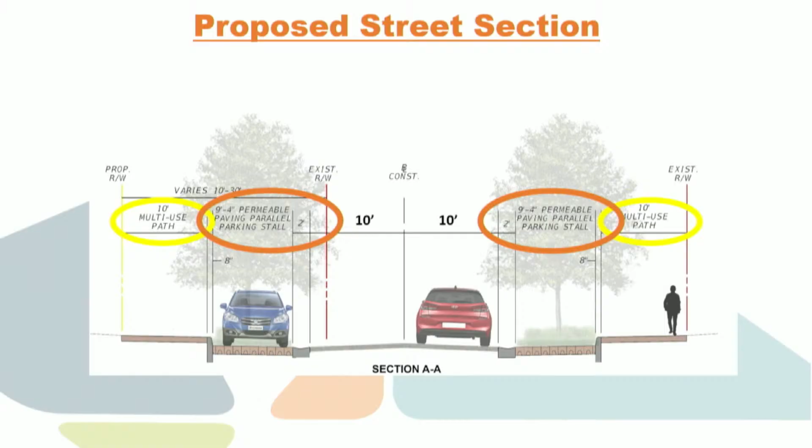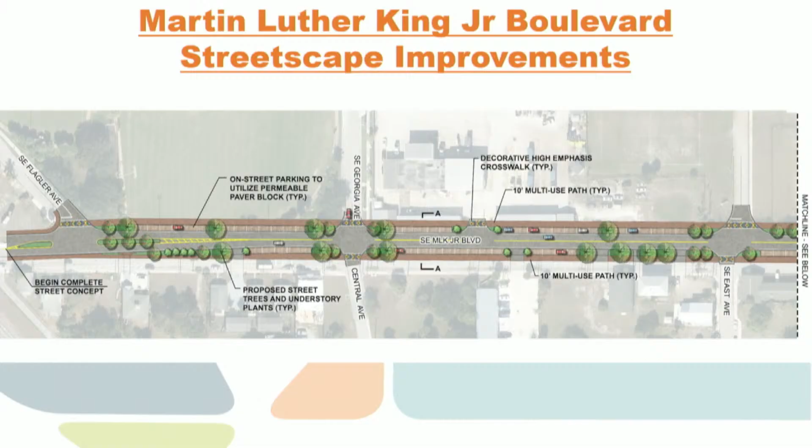So this is the concept plan. It starts just east of the railroad right-of-way at Flagler Avenue and extends down to Palm Beach Road. This is the eastern section, showing the streetscape ending at Tarpon.

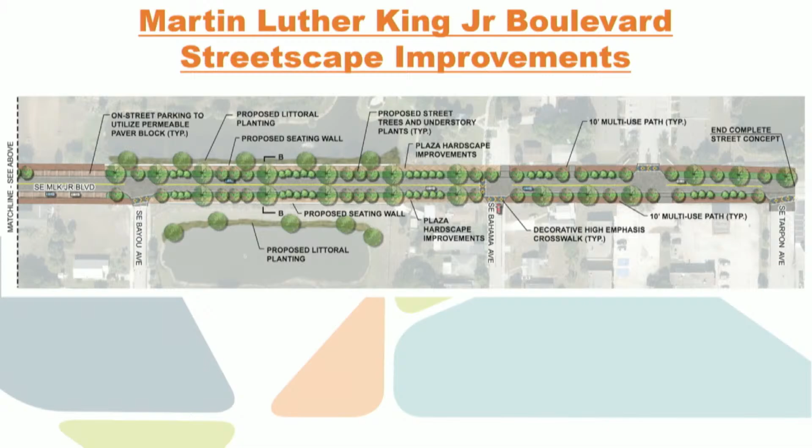At the time the concept plan was developed, we had not entertained extending the pedestrian improvements east to Palm Beach Road, but that is now a component of the overall project—extending the sidewalk improvements on the north side to Palm Beach. As I mentioned, 96% of online survey respondents were in favor of it. There is a sidewalk today on the south side, but not on the north side.

So the design aspects I wanted to speak to and present this afternoon consist of water quality, parking, traffic calming, the landscape palette identified for this corridor, proposed right-of-way needs, and a brief discussion of the community input that's been gathered.

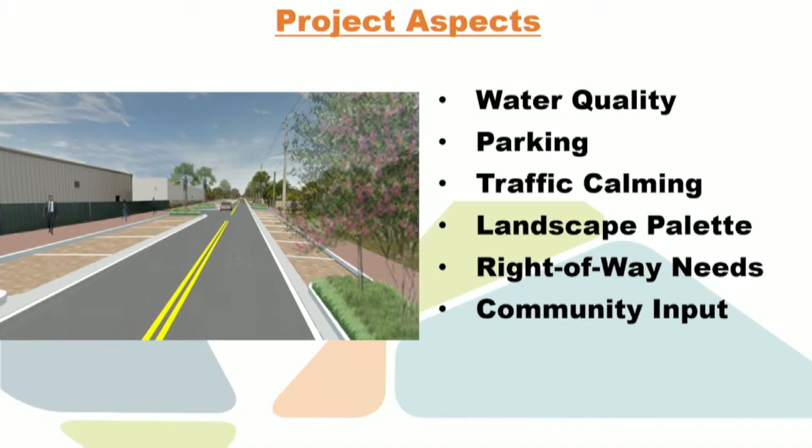The articulated permeable pavers are proposed to be located in the on-street parallel parking stalls, very similarly to what's been recently constructed on Seminole Street, within walking distance of where we are. The permeable pavers will sit on 18 inches of stone aggregate and will represent approximately 3/10 of an acre-foot of additional water quality treatment associated with the improvements of MLK Boulevard.

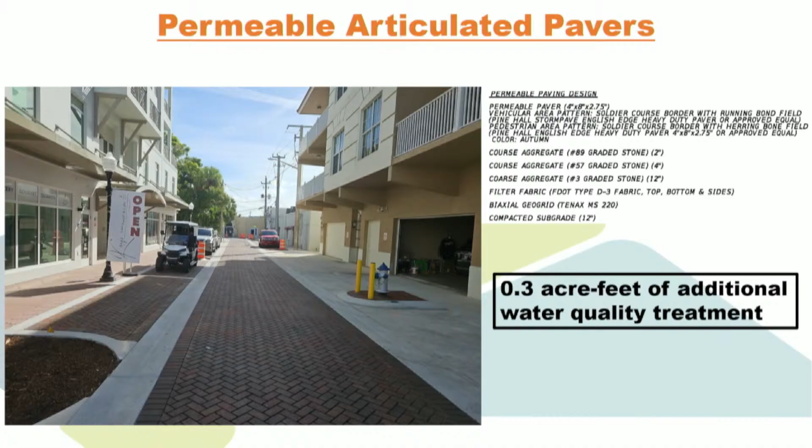So for the proposed parking, respondents and stakeholders provided a lot of feedback, and there was a strong desire not to reduce overall parking. The existing parking characteristics: we have 51 head-in parking stalls, 29 parallel parking stalls, for a total of 80 parking stalls today within the roadway right-of-way. 4 of those 80 are accessible.

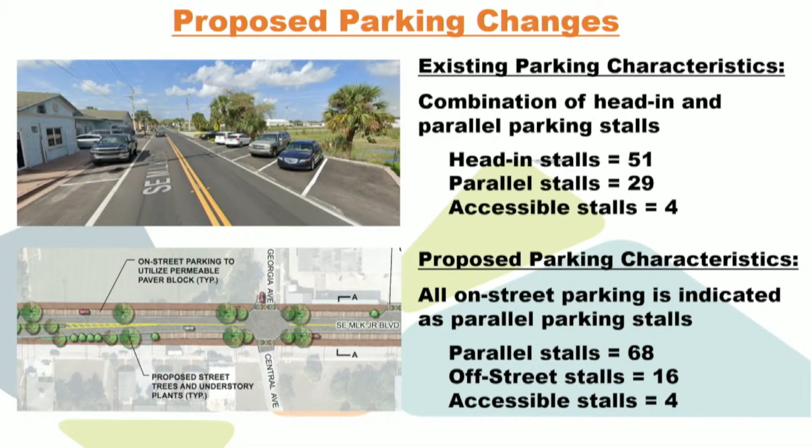The plan as it currently stands has 68 parallel parking stalls. We also have an off-street parking lot, which I'll get into more detail on, for a total of, I believe, 84, and 4 of those will remain accessible.

For the proposed off-street parking, because of stakeholder input and community reservations about a reduction of parking along MLK Boulevard, we have proposed to take a piece of city property currently used as an impound lot for the police department, on the north side just east of the solid waste compound. As shown in the image, this will represent 18 additional parking stalls. It is within city property, and this off-street parking lot will allow us to exceed current available parking associated with MLK.

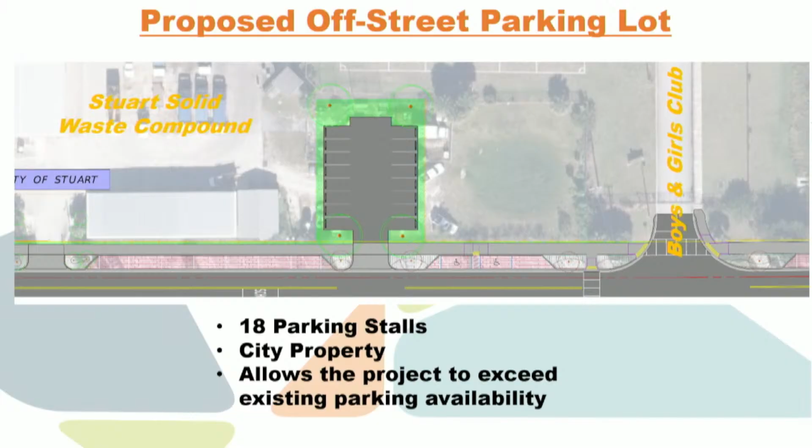So traffic calming was one of the higher priorities the community wanted to see—elements to encourage slower vehicular speeds along MLK.

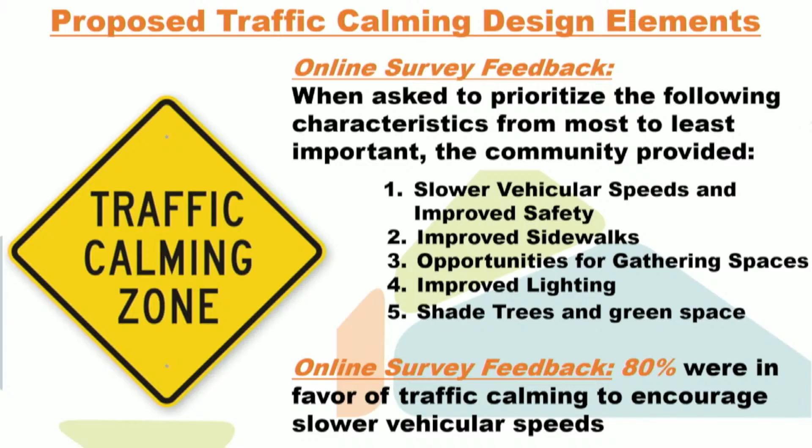They had identified that as their top priority, and 80% were in favor of traffic calming to encourage slower speeds. The traffic calming elements integrated into this project are on-street parking, lane width selection, intersection bulb outs, landscape placement, roadway material, and intersection stop control. I'll go into a couple of those.

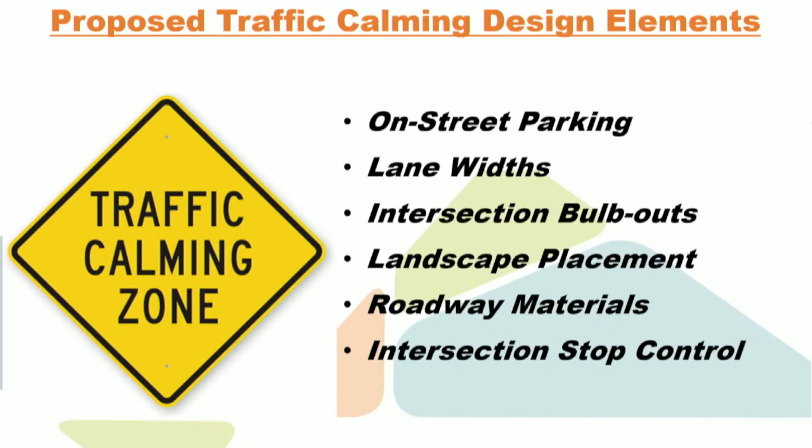Intersection bulb outs or curb extensions are an extension of the curb line, resulting in a reduced crossing distance for pedestrian crossings of the associated roadway. Bulb outs improve sight visibility between pedestrians and vehicular traffic, and encourage slower vehicular speeds by narrowing the roadway, with that projection of the curb line coincidental with the on-street parallel parking. Another benefit is that it physically prohibits motorists from parking too close to intersections, which can impede sight lines and be a hazard.

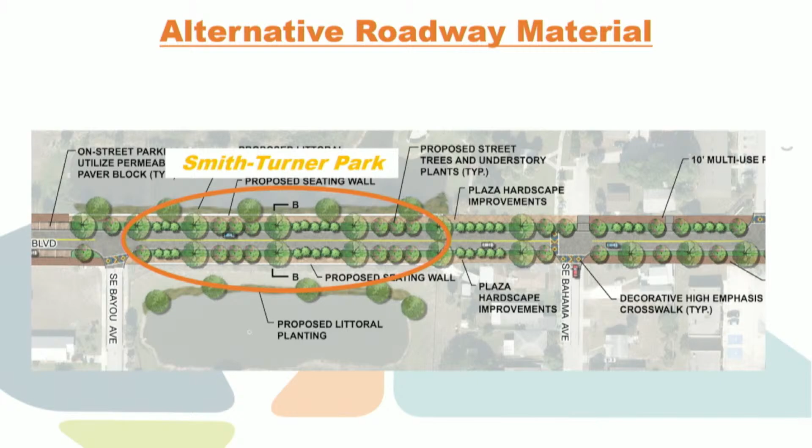For the alternative roadway material, like the parallel parking stalls proposed to have permeable pavers, we're proposing this stretch of MLK adjacent to Smith Turner Park to have permeable pavers as an additional element for traffic calming to encourage slower speeds. The rumble, if you will, transitioning from asphalt to pavers has been shown to encourage slower speeds.

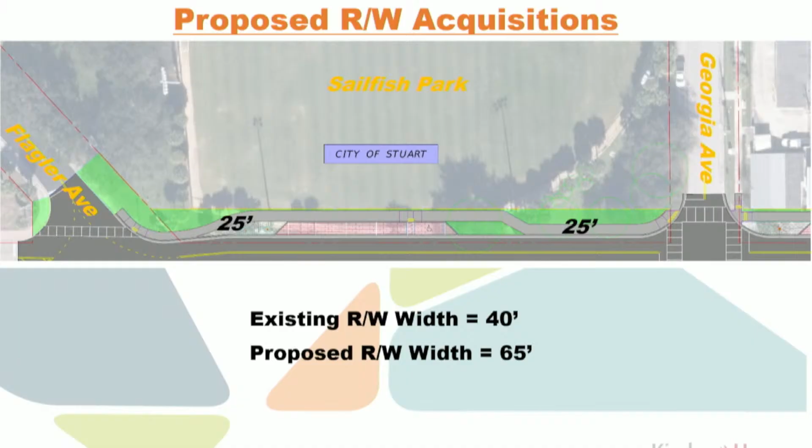Secondly, just east of Georgia Avenue, to accommodate the off-street parking lot, we're proposing likewise a 25-foot expansion of the 40-foot existing roadway right-of-way. This expansion does not impact the buildings, but a proposed fence for security purposes will be constructed approximately 15 inches south of the existing buildings that are out there today.

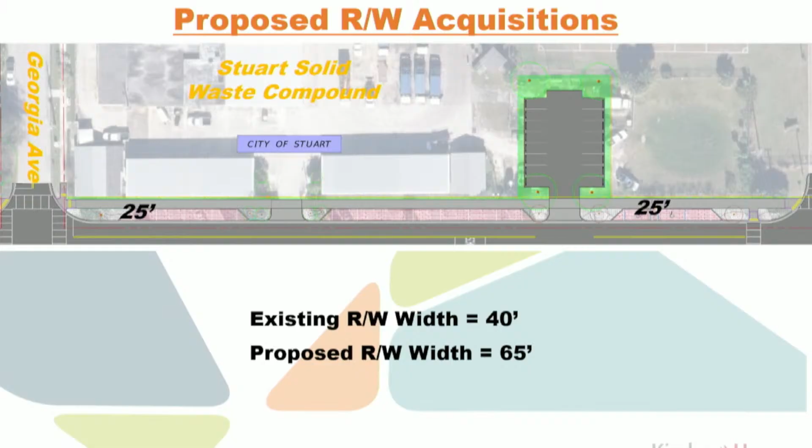Lastly, east of the Boys and Girls Club entrance, or Stuart Middle School, however you refer to it, there's a school board piece of property for which we are also asking acquisition of 25 feet of right-of-way to expand the corridor to accommodate the proposed improvements.

The overall project benefits include improved pedestrian mobility with the expansion of the sidewalk network, and improved corridor safety with traffic calming elements such as bulb outs or curb extensions. We anticipate slower vehicular speeds as a result of the overall improvements. As mentioned, we have approximately 3/10 of an acre-foot of additional water quality treatment. This will introduce opportunities for other community gathering spaces on the corridor, result in corridor beautification with landscape and hardscape improvements, and represent a direct investment in the East Stuart community.

You had two slides that showed a great amount of vegetation on both sides. Go back to those. I'm just wondering, I know Ms. Moser's primary concern, shared by the group, is slower speeds and improved safety, and we know that trees, especially big impressive shade trees, really slow traffic down. Did she see this picture and still think we need more vegetation? I'm just asking because I know she spoke. Yes, sir, she did.

I'm not speaking for Ms. Moser, I just know my understanding of our conversation. So this is a concept plan. What Ms. Moser was looking at was the actual 60% construction plans. When we do this, we aren't evaluating existing utilities, all the water mains, the gravity sewers, the force mains, the gas mains, the fiber lines, the reuse mains that are underground, as well as this concept plan didn't take into account or consider that FP&L has distribution lines on the south side.

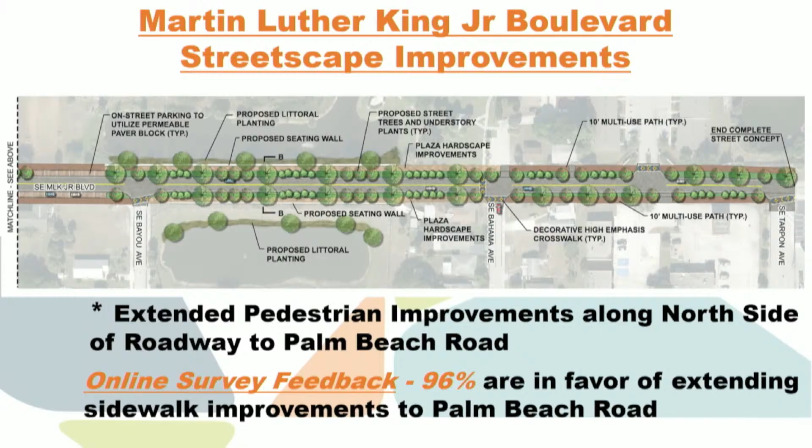One of the concerns Ms. Moser expressed to us, once we had an opportunity to explain what the constraints were, I think she understood, but she still had a desire to see more shade trees, and we can recommend that. We said, as long as the CRA and everyone's aware there's a potential, if say live oaks go on the south side of the road, when FP&L's trimming contractors come through, there is a high probability of chewing those trees up as they do. We were trying to provide trees more in line with FP&L. You may have heard FP&L has a policy, right tree, right place, based upon the tree and the placement relative to their infrastructure.

So we were trying to stay consistent with their guidelines to minimize the hacking of the trees that takes place with the pruning and trimming. Sometimes they hack them up a little bit. So we have concerns about live oaks on the south side of the corridor for that reason, as well as utilities, city utilities aren't big fans of placing a live oak on top of or immediately adjacent to city utilities, for the reasons you can probably imagine. So we assured her that as we move forward, we'll continue to look for opportunities to increase the shade tree varieties that we showed on the palette.

Mr. Mayor, would you agree that folks would like to see as much shade as possible? Is it appropriate to have two different approaches on the other side? Yeah, that was my concern. We didn't, and you can do that, right? The north side has more. Is that poor planning aesthetically? Aesthetically, it just doesn't look right where you have smaller trees on one side. Is there a way to intermix or find a way where it's not going to interfere with the power lines, yet we can get as much shade as possible? That's what we believe we had proposed within the 60%.

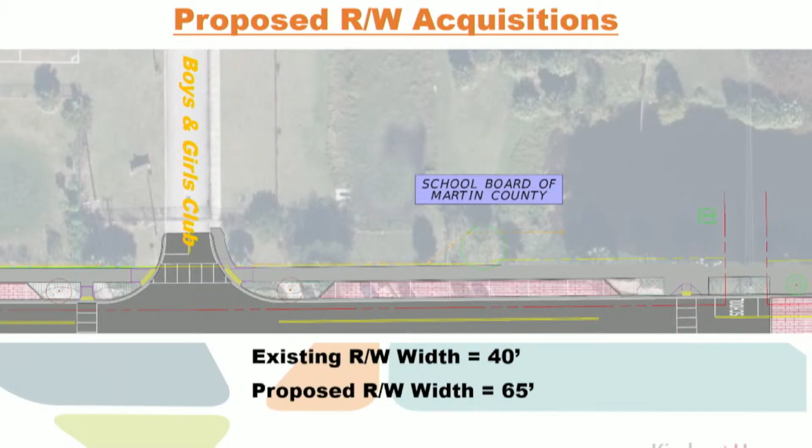Okay, that sounds good. Then the next thing is right in that area, well actually all along MLK, but especially from Georgia Avenue going east - I noticed that you have something about a monument, and then another label where the seat walls and some other things have a certain name to it. Is that where you're identifying potential monuments? Yes, ma'am, that is correct.

So in that area that we were just looking at with Smith Turner Park, that's the plaza area. Yes, ma'am. So when we originally conceptualized, we had identified a 20-foot wide plaza area on the north and south side of MLK. We have proposed to reduce that down to 16 feet on the north and 16 feet on the south. The reason being, we have to do bulkhead walls because we have lakes on both sides to minimize encroachment into those water bodies, and I have FP&L distribution lines on the south side that run parallel to MLK.

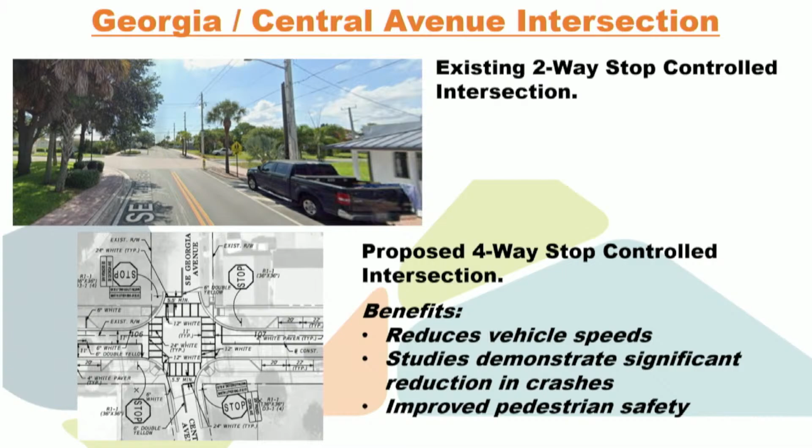And when we laid the 20-foot plaza widths out, our gravity walls were having to jog around the existing poles, so we were having these pinch points every 250 feet to neck down to 16 feet. So we thought it would be a better aesthetic to maintain a consistent wall width, as well as reduce the encroachment into those two water bodies. Okay.

Thank you. Are you finished? Yeah.

Let's go back to where the trees on Martin Luther King Boulevard were discussed, where the oak trees would provide the best shade, but there's an issue with how FP&L maintains them if they need to cut them. Is there a possibility to make some sort of agreement, even on a small monetary basis, for them to trim them rather than hack them?

I don't know, and I don't mean to disparage FP&L's maintenance crews on their trimming. They will tell you they take due care in trimming the trees, but as you've probably noticed in practice, they're there to protect the infrastructure the utility lines represent, not to minimize the shock to the tree. So we typically see over-pruning, which is a detriment to the welfare of the tree.

Is there a way to work with them? Every utility company across the country does this. Everybody knows they hack trees, they don't trim them, because they're only interested in their infrastructure. Is there a way to work with them locally, is all I'm asking.

Have the city take it over? No, not that. I have not, to my experience, seen a resolution to that.